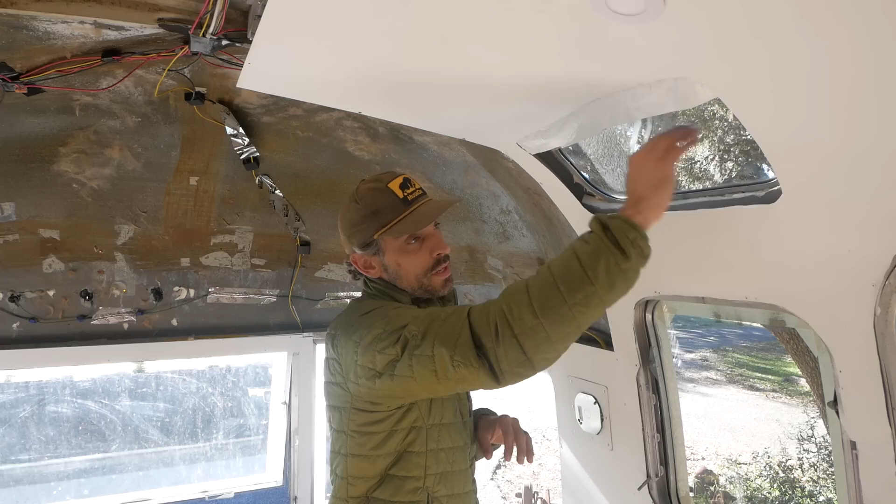I'm going to be doing a lot of CNC work, getting the radius, the curve of the window, jigs for the kerf bending on the wood, all kinds of cool stuff. So let's just jump right in and get started on this build.

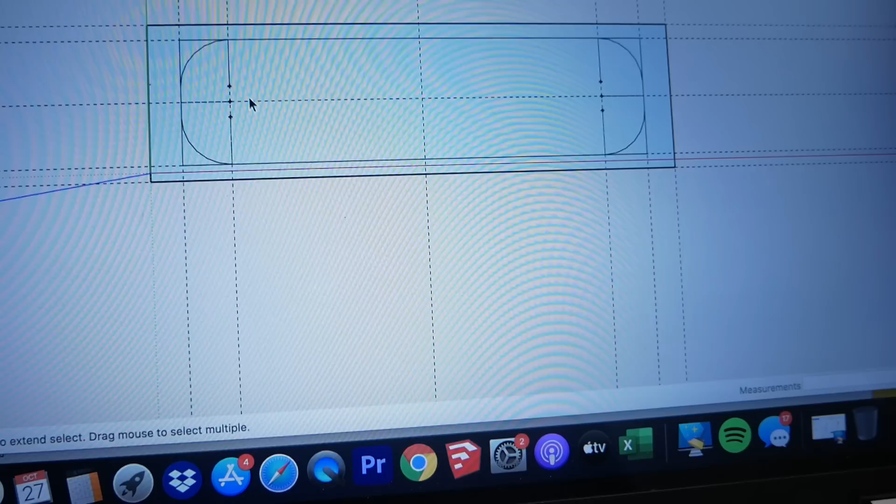Before we start cutting material, first thing I want to do is make a template of the profile of the window. You can see here in SketchUp I've started doing that. I'm basically making a guess at these corner radiuses, and I think I'm pretty close. What I'm going to do now is mill up a piece of MDF into something real thin, maybe an eighth of an inch, set it up on the CNC and cut out this curved profile, then set it up on the window and see exactly how it fits.

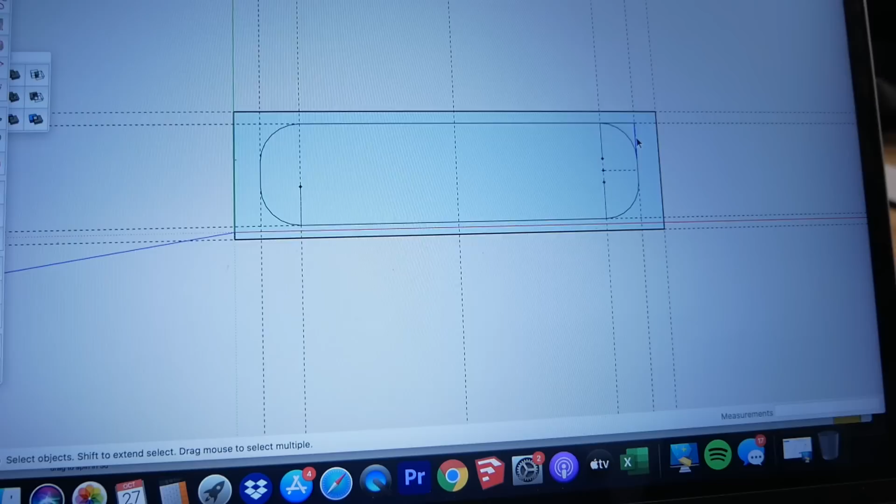If it doesn't fit quite right, we can come back into SketchUp and make a few adjustments. Let me get this deleted out. So there you go, that's what we're going to make right there. Let me get rid of my guides. Basically that's this shroud, the piece that sits on the actual window frame. We're going to send this over to the X-Carve, cut it real quick in that MDF, and put it up there to see how it fits.

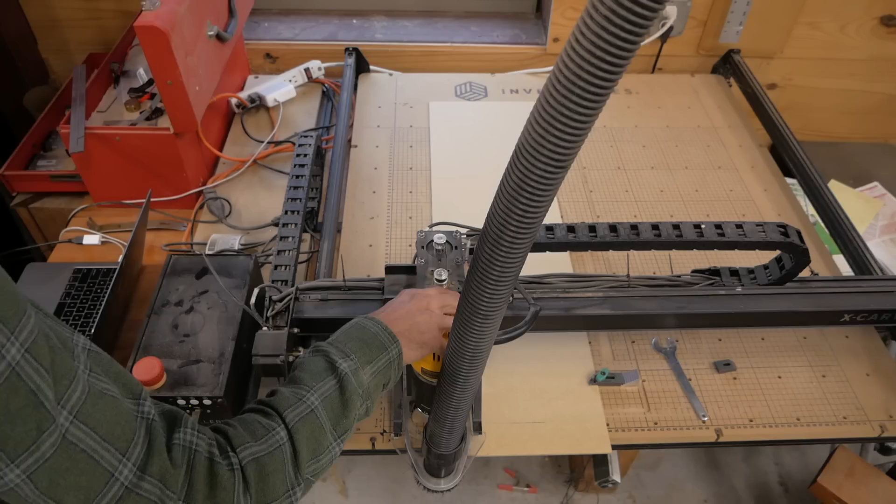So the first thing I want to point out is that this workpiece is actually maxing out the table size I have on the X-Carve. You can see it's hanging off the front, and I've measured back 2 inches to the edge of my carving to home the machine at that 2-inch line. That way I have as much of the actual carving on the work table as possible, getting all the length of those rails. There's a level of excitement here as I round that back corner, because at this point I'm unsure if it's going to make it. I'm a little worried it's going to hit the back of the rails and not make the corner, not cut the profile, which would cause problems and make this a little more difficult.

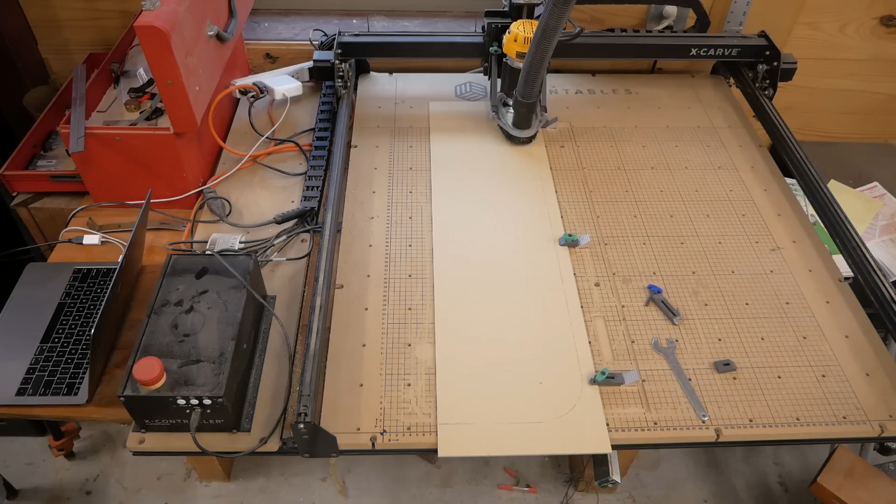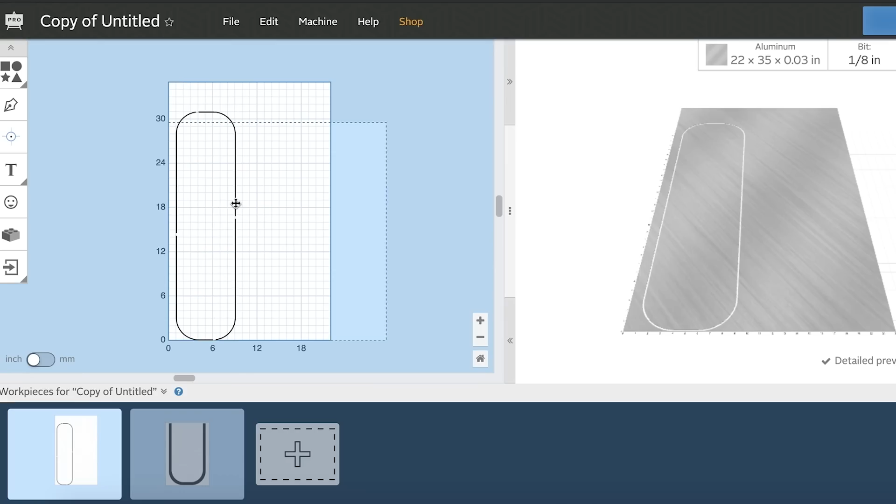Okay, so now that we've rounded that corner, let's talk a little about this X-Carve. My workflow is I draw in SketchUp, which has a plugin that exports my file as an SVG, a scalable vector graphic. Once you get it into Easel, you have a lot of control over what you do. You can change the shape of it, change how it cuts, clear out a pocket, or, what we're doing here, cut inside our line. You can also change where it sits on your material.

You have a wide range of control within Easel, and you can also design within Easel as well. One thing I like about Easel is you can simulate the cut, so it shows your toolpath on the right. That way I know where to put my hold downs. Otherwise, there's a good chance you'll run your tooling right through a hold down, which I've done several times. So that's what I love about Easel, it just simplifies the CNC process.

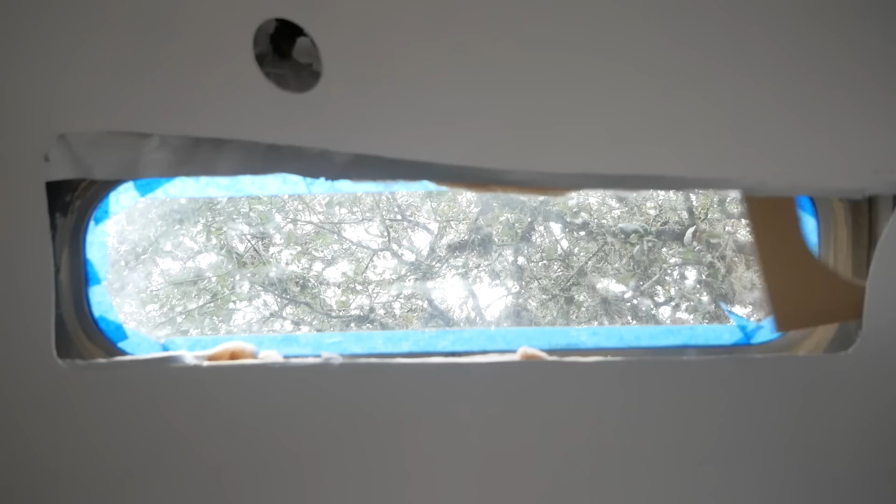Okay, so we pull that off, and then we're going to check the fit here and see how it goes. Man, that is not perfect, but it's really close. Okay, so I hit it on the first try, which is always good. You can see it's a little bit tight here, but I can actually slide it over. If we slide it all the way over, I think we're in a good spot. So this really worked out great.

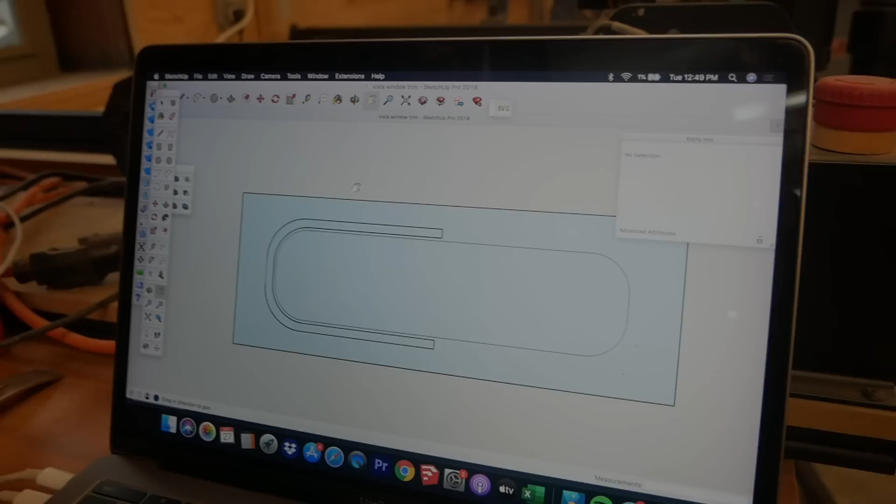Okay, back into SketchUp. I want to try to explain this to you real quick because we're on our second carve. This inside curve is that first original carve we did, the window opening, which worked beautifully. Everything is good on that.

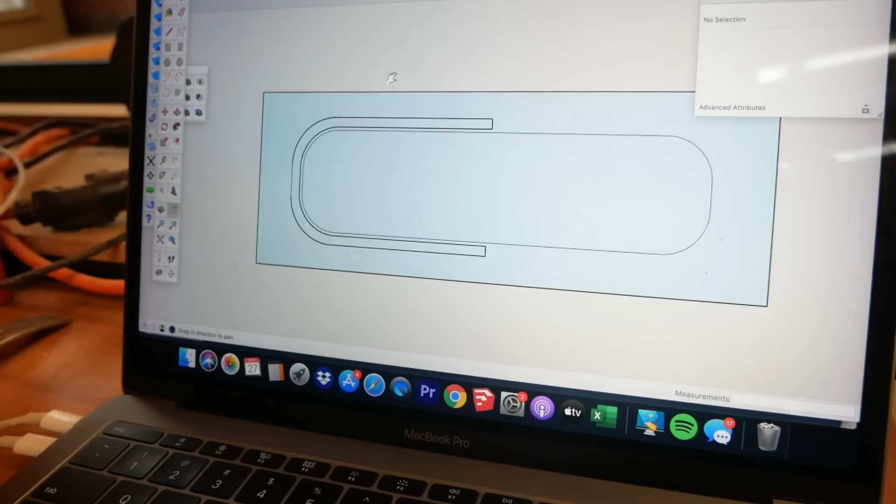Now what we're going to do is I've drawn in this kind of track behind the window. It sets back a quarter of an inch and it's three quarters of an inch in width. This is a form basically out of three quarter plywood that is going to set a piece of kerf board. So we're going to use a piece of wood, kerf it, and bend it into this shape. Then as it sets in this form we're making, we'll Bondo it or use some kind of adhesive to lock it in place.

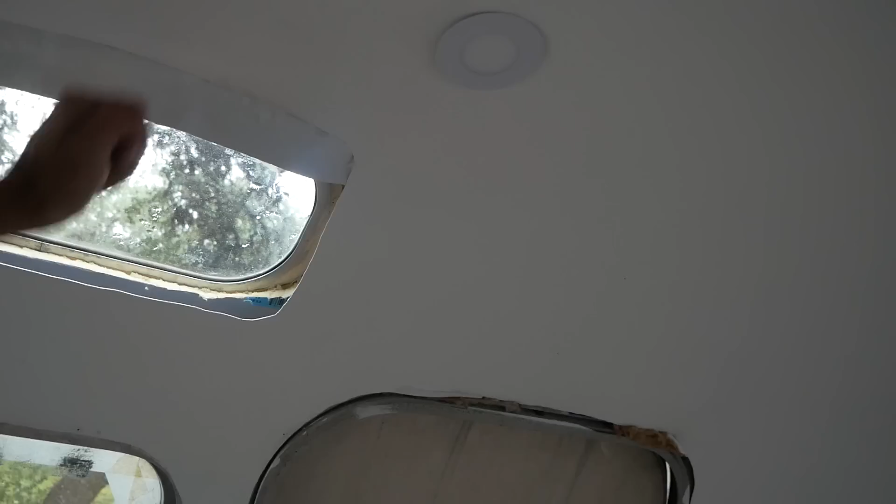The point of that board is to close in the wall space. We have a one and five-eighths inch wall space, that's where our wires and insulation go, and we have to close that in. So we're using this board to do that, and it's obviously got to take the curve and shape of the window. Hopefully this will make more sense, and I think it will as we get further along in the build and you actually see these pieces get made and get used.

Now another thing I love about having the CNC is it does work while I do work. So it's kind of like my shop buddy, or my apprentice—well, not really an apprentice, but it can work while I do work, which is nice.

So while this is carving and making this little jig for our kerf board, we're going to work on actually making the kerf board. So I go to my table saw, I've milled out these parts, they're three quarters of an inch thick. I think they're 1.25 inches wide and 40 inches long. And we're just kerfing out the middle area that bends. There's a long stretch of straight, obviously, that we just keep solid.

This is a learning curve for me. I've made some kerf board, but it's been a long time, and basically you're just trial and error right now. And you're going to see quite a bit of error before I figure out what the heck's going on with this.

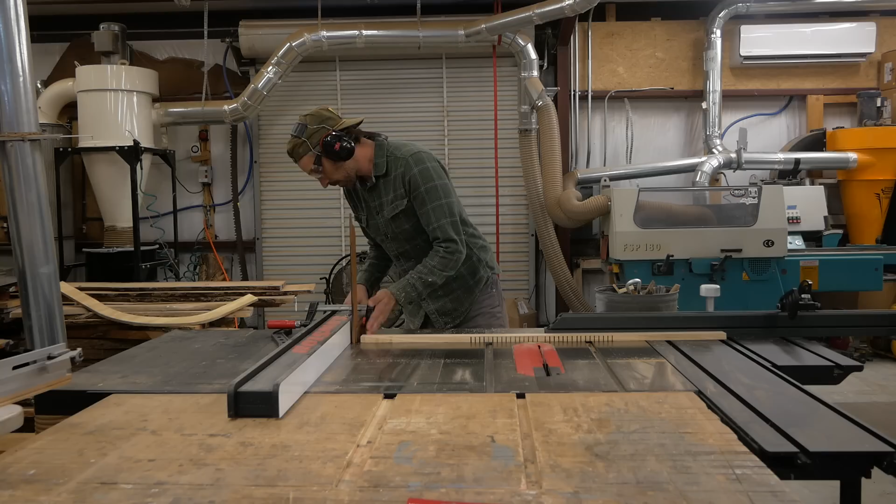So on this second piece, I'm just trying something different. That's basically trial and error, like I said. I think I'm cutting, I raised the blade, cutting a little higher, getting a little bit thinner strip on top that hopefully will allow it to bend better. It's not going to work.

One thing you're going to notice with this particular video is there was a lot of error, a lot of mistakes, a lot of figuring things out. And usually when that happens, the camera tends to be put on the back burner. So some of the filming is a little spotty, and I'm trying to explain my way through it because I think this is a valuable video to post regardless of the struggles. So we're going to jump ahead here, and I'm going to explain basically how I eventually figured out how to make this work.

Okay, so let's stop and take a quick look at where we're at with this. Now, it's taken me quite a few tries. As you saw, I started off using cypress, broke that, and switched over to hickory because hickory has much better bending capabilities. Hickory, oak, species like that, walnut, cherry, all can bend well.

This is hickory, and this piece is just about there. It's a little bit broken, but what we're doing is basically dropping it into the form and Bondo it. Once the Bondo sets, it's going to hold its shape just like this.

Now this one's not quite right. I think the issue I'm having is my spacing on my kerfs are too far apart. There's a lot of factors that go into kerf bending, and I haven't done a lot of it, so this is a bit of trial and error for me. You got to make a lot of mistakes before you figure it out. So I think I'm there.

This is my newest piece. I've got way more kerfs in this one, and it feels like it's going to bend much better. The one good thing from this is that I know my jig is good. This process worked pretty good. This is the original template we cut for the window opening. I have the actual aluminum one on the CNC, and it's finished cutting. This drops on and you get pretty much exactly a quarter inch reveal.

With the tighter kerfs, it worked really well. This actually bent much nicer. Sometimes you could feel little dimples on the front face, but this was smooth all the way around. It's a little tricky getting it into that jig, but once you got it set on top, you could hammer it down and seat it in there real well.

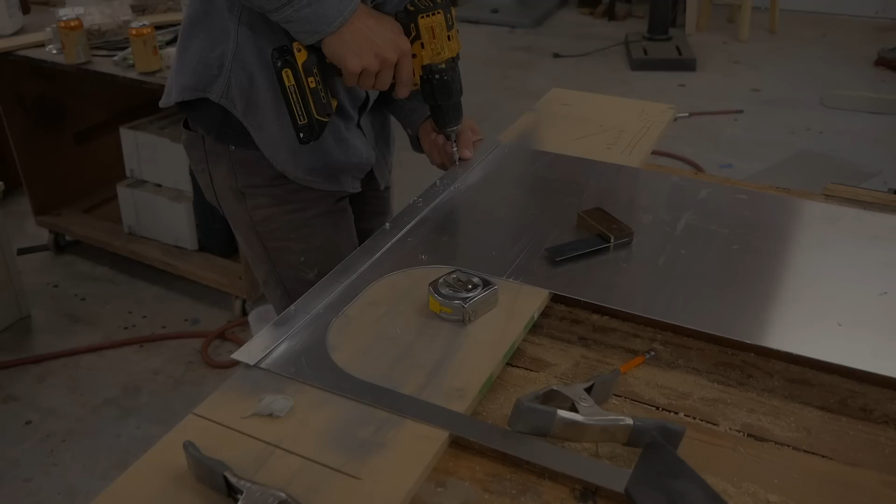Now while that dries, we're going to get into the sheet metal work. This is absolutely out of my comfort zone—I'm just figuring this out, don't know anything about sheet metal work. Basically what we're doing is making a slide, the part that catches the window screen to slide it. I'm stacking two pieces on top of that aluminum sheet with the hole in it—one about a half inch wide and one about an inch wide—so it gives a little slot for the screen to ride in.

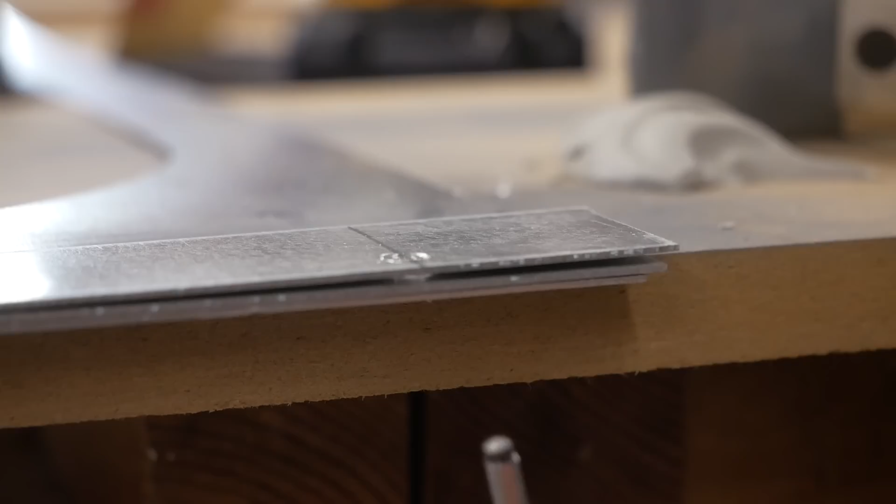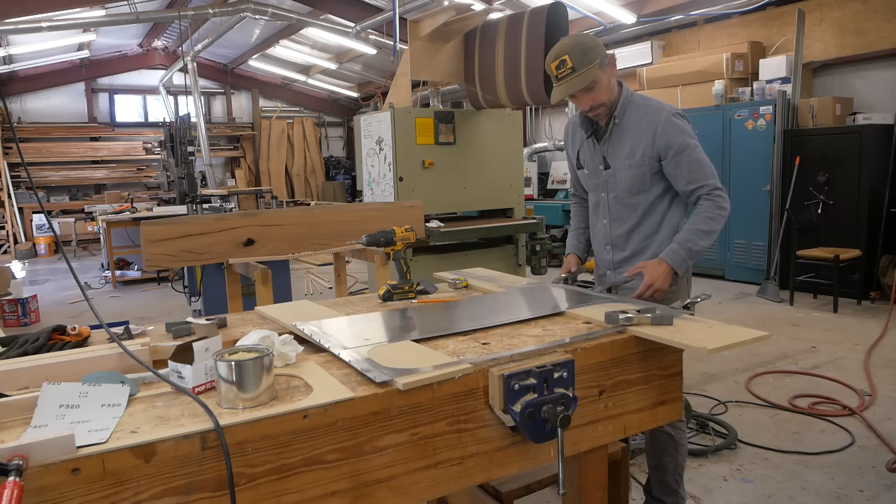First mistake I'm making is right here as I drill these holes. For one, I don't have anything clamping it down. For two, I found that when I drill the holes, it puts burrs on the other side of the metal, so when I riveted them, it's actually not stitching it together at all in some places. You'll see in the shot it looks pretty good, but throughout the length of the workpiece there are little gaps, and those gaps are going to come back to haunt me—it's going to cause a lot of issues.

So once I get that side riveted on, put my screen in, and then push the other side up against it, put some spring clamps on it, and do the exact same thing, rivet it down. We're actually going to come back later in the video and redo this because this is not the right way to do it.

Okay, so we got our trim ring ready, the epoxy dry. I'm just going to basically screw this onto this aluminum shroud I've made. One issue we're going to have is this: there's a slight curve to the window because it's an Airstream, and this wood trim is flat. We're going to have to fix that soon too. This is all kind of me figuring out as I go. I do put some washers in between the wood trim and the metal shroud, just so the metal shade can slide in behind that wood trim, and we'll see if that works.

Shade is not going to work. Just too much flex in there. It's too hard to pull on, too much flex on it.

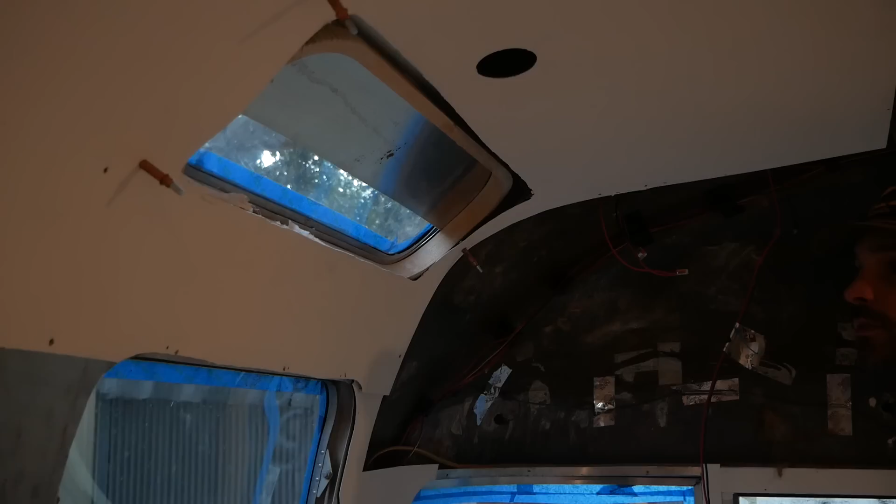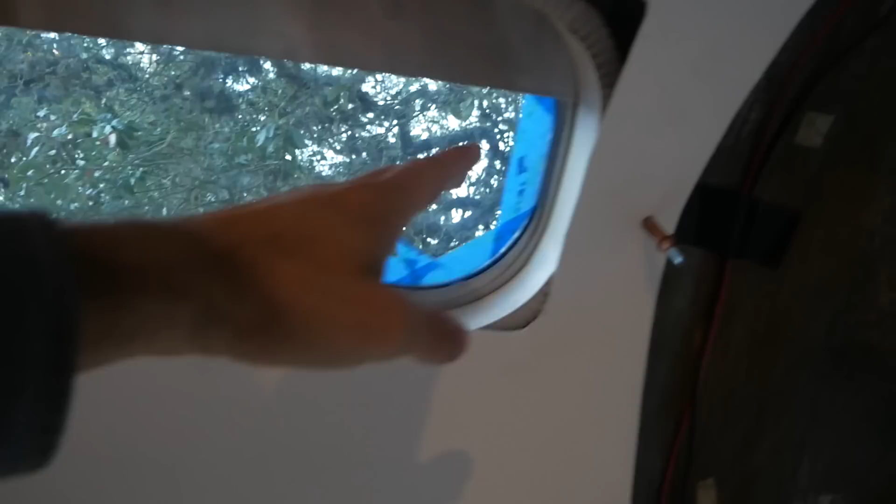Okay, so here's what I got. I've got the wall Cleco'd. The first thing you'll notice is the original opening is just a really bad opening. We're going to fix that, probably gonna have to cut it out a little bit bigger and then put another aluminum trim piece on this that will close in these gaps. That's the least of my problems right now. The shade doesn't work very well because the wood is binding it. The wood is straight and the wall's curved, the window's curved, so that's where the binding's happening. Also, the attachment I've used here is hitting, so that's sitting out a little too far. I'm just really close to scrapping this.

I really am. I just don't know. I don't know if I'm ever gonna get it right. Cleco's popped out. You know, it's just not right. I don't know.

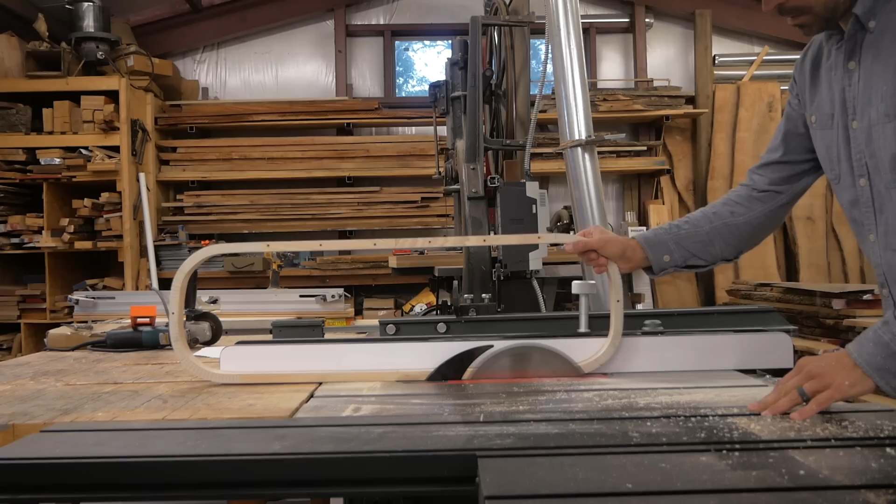Okay, first off, if you're gonna execute this and make this cut and build this, be careful. You need to be very cautious what you're doing here, where you're putting pressure, how you're feeding the piece. I've got the blade set to, I think, 6 degrees, so we're cutting a nice little bevel on the bottom of this to give it that kind of rounded shape. You can see right there how it kind of rocks. This ends up working pretty well, but it's going to take me a couple tries of fitting it on and off the camper to get the bevel dialed in right.

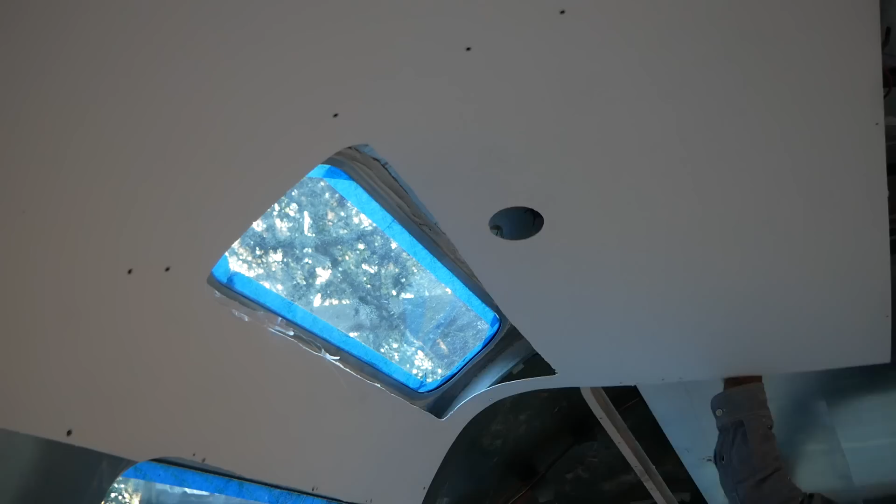Now there's other ways I could do this. I could sand it kind of round. If I was smart enough with the CNC, I could actually program my CNC to probably sculpt it round. Might take a while, but the beveling on the table saw worked pretty quick and easy.

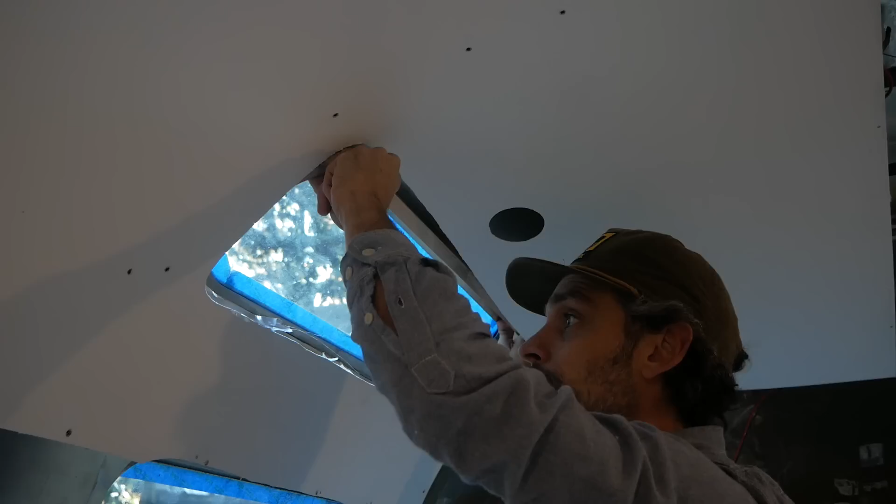But here's the problem. As I mentioned earlier, the spacing on the slides, the gaps in there are going to start giving me problems, because every time I've taken this in and out and fitted it, it's kind of messed with it a little bit, and now something's happened and it's just not sliding at all. It looks good, fits well, but the shade just does not function. See how it slides.

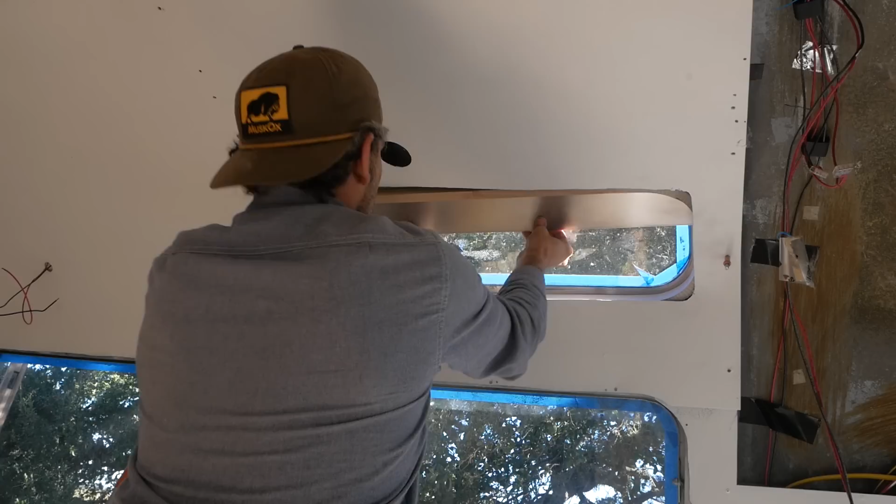Come on, what is going on? It's worse. Why is it worse? When do you move? That's it, I'm done, no more. This is not happening. I tried. Unfortunately, I failed. Sucks, wasted 2 days. Oh, man.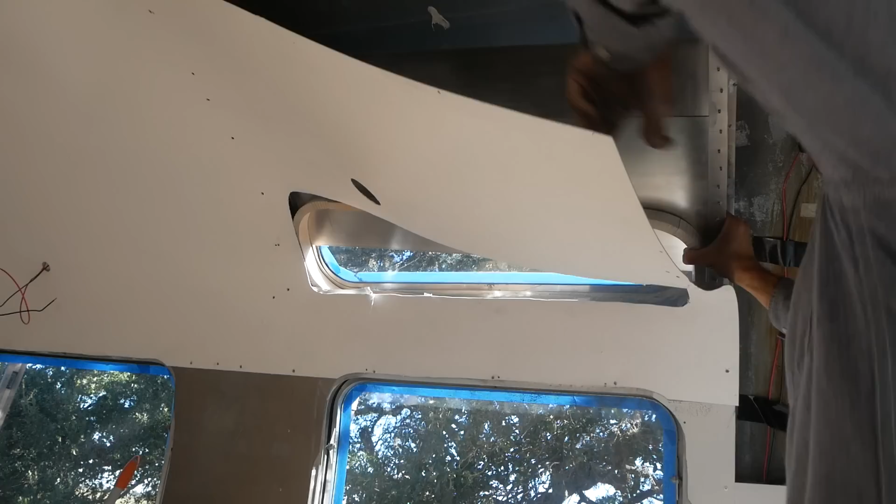Not sliding. This was sliding so much better. Okay, so I think you could sense my frustration there. I just about gave up at this point. I really almost scrapped it. This was the last thing I tried. I thought, you know what, I should take it apart and redo the slides. And this is how I did them, and I think this is amazing how it made all the difference.

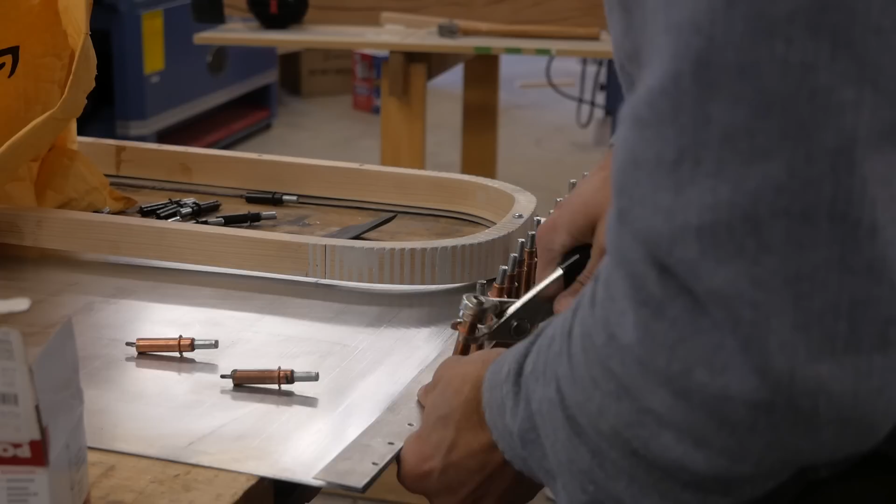I basically took it all apart, sanded the slides, got all the burrs off, got them smooth, Clecoed them all in so it clamped it tight down, and basically pulled the Clecos out, riveted it, did that whole process, and it put it on there perfectly. They were sandwiched together really well. I will say that I'm using too long of rivets. That's all I had left, so I just went with it.

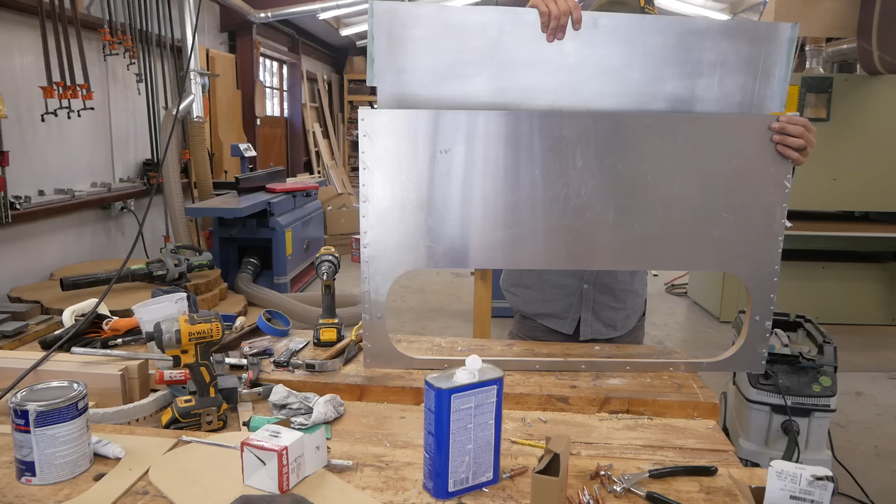This came to me at the very end. I thought, well, I have some grease. Why don't we just grease up these slides, help lubricate it, help it move a little bit. And it ended up just working beautifully. You can see in the video how excited I am that it actually worked.

This is me being excited. Wow, the beauty of grease. It works. Oh my gosh. Works beautifully. That grease is all it needed.

Let's go put it in. Okay, so here it is, about 90% of the way done.

Still has some issues. Now you can see I went ahead and added this front shroud to cover up this nasty cutout. Still haven't attached it yet. I need the proper size rivets. I totally ran out of rivets, so it's basically held up with Clecos.

This looks sloppy right now, but when I get this all riveted down, it's going to flush up pretty good. And I'm not going to worry about a little bit of a gap here between the wood and the outside wall. It just doesn't bother me.

Once I rivet this, it's not going to look that bad. It's kind of why I left this shroud inside of the metal a little bit, just to kind of conceal it, hide it. You're going to be able to look in there a little bit, but I don't think it looks bad. To make it conform and fit to the curve of the wall is just another aspect to complicate this that I'm not going to worry about.

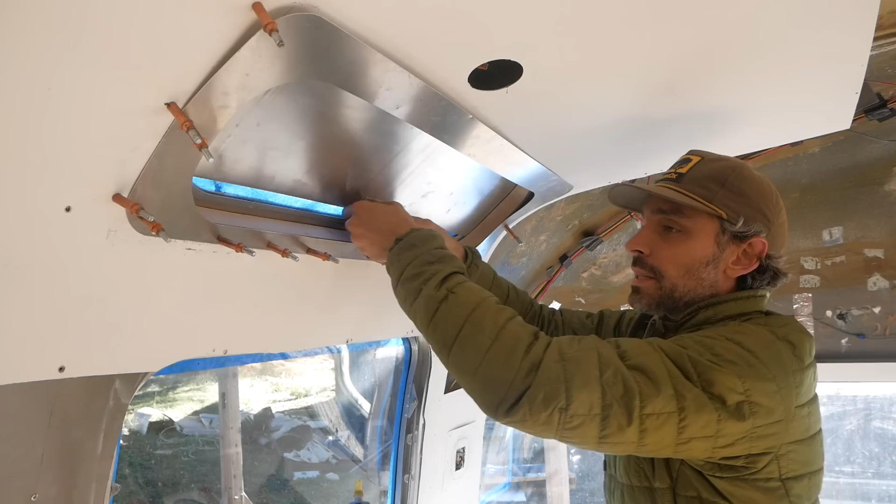I'm not exactly sure at this point what the best thing to do is, because it really glides well, but it takes too much force. It takes too much effort to close it. I can do it, but my wife unfortunately would not be able to do it. Neither would my kids. So I need to find where it's binding and work on it, but I think I'm there. I think it looks good.

The wood trim, we're going to do a little bit of work. Replace the Bondo with a more stout epoxy adhesive in those kerfs so it's stronger, because I wouldn't put this in the trailer now. This is strictly a prototype, because it's pretty beat up from being in and out, in and out.

I'm pretty happy with this. This was a struggle. I spent 3 full days getting to this point, and I almost threw in the towel multiple times, as I mentioned. So I'm just happy to have this here.

I'm going to take a little break from it. We're going to follow up in one of the vlogs and get all of them installed once I dial this in, and I'm going to provide plans for these. So once I figure it all out, I'm going to draw it up nice and have plans available. It's not an easy build, but at least you'd have curves, templates, and dimensions to fit a standard.

This is a 31-inch or 30-inch Vista window.